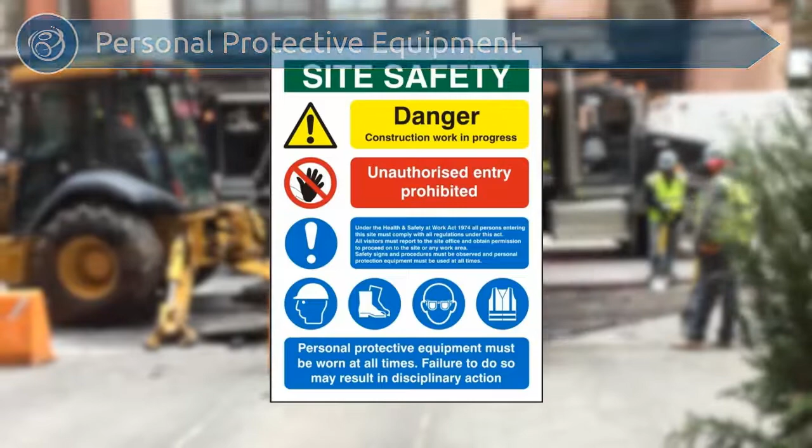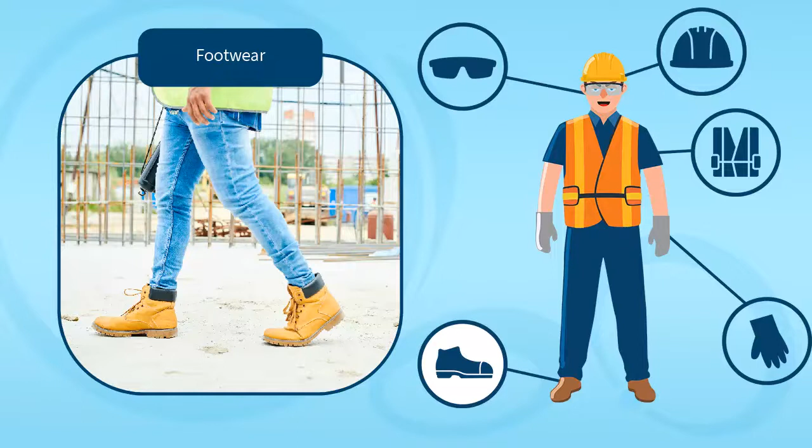Working on a construction site comes with many risks that can be mitigated with the use of personal protective equipment, PPE. The following articles are required when working on site. Footwear. Work sites present risk of injury from nails or other sharp objects penetrating shoes, as well as risk of heavy objects being accidentally dropped onto a worker's feet. To minimize this risk, steel toe-capped boots with midsoles are required to be worn at all times.

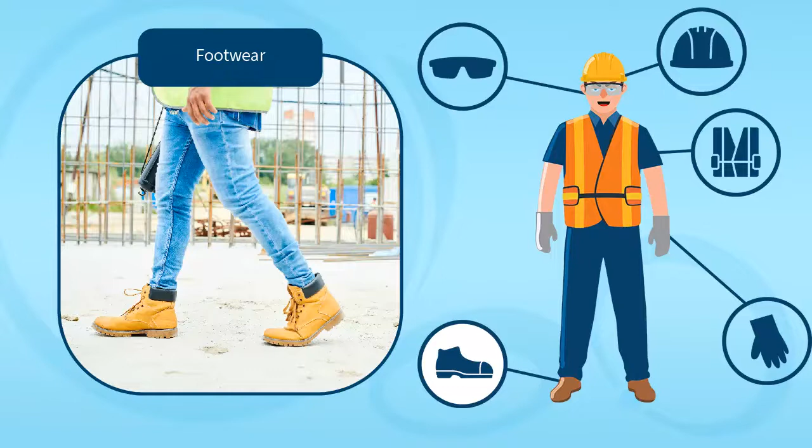Waterproof steel toe-cap boots offer essential protection from burns when working with wet cement or concrete due to its highly corrosive nature. Hard hats. Minimizing risk of injury from falling objects is a priority on any site. Barriers and toe boards on work platforms are provided in order to prevent falling materials. Hard hats add protection from any other risks and must be worn at all times when on site. They must also be worn correctly and fitted properly.

Eye protection. Safety glasses or goggles are to be worn to protect workers when performing tasks such as disc cutting, using a nail gun, welding or working with chemicals. Gloves. When dealing with wet concrete or dust, gloves should be worn to prevent dermatitis, as well as to offer protection from splinters and cuts when working with bricks, steel and wood. High visibility clothing. Clean, high-visibility clothing should be worn to protect workers from accidents caused by vehicle or equipment operators.

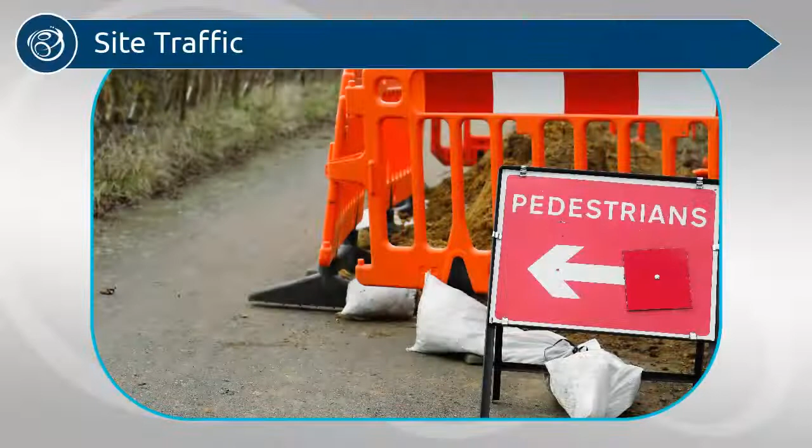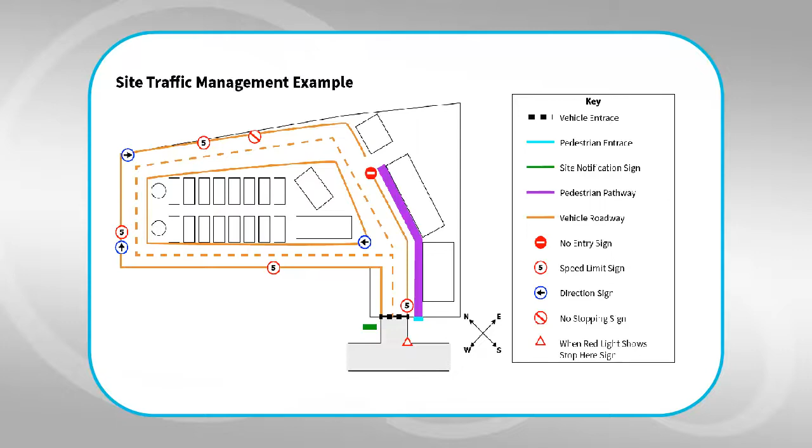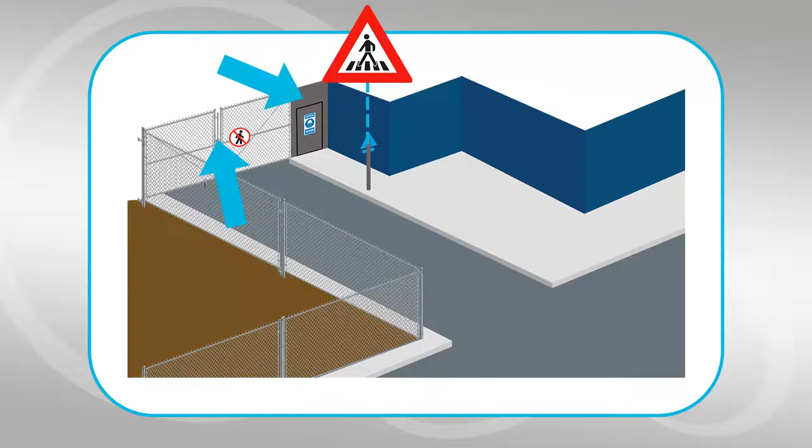Well-lit, clearly signposted crossing points are provided where walkways need to cross a roadway. Separate entrances are provided for both pedestrians and vehicles. At any exits where vehicles may have to cross the public footway, workers must ensure that visibility of approaching pedestrians is possible by using wire mesh fencing around site exits.

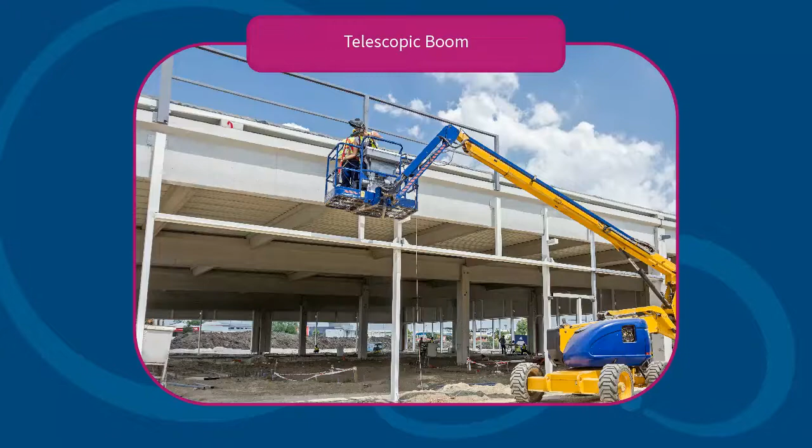When working at height from a ladder or a platform is not possible, mobile access equipment, such as mobile elevating work platforms, can be used to ensure safety and prevent falls. There are three main types of mobile elevating work platforms, MEWPs. Telescopic boom, commonly known as a cherry picker, provides vertical lift and outreach. Scissor lift provides vertical lift only.

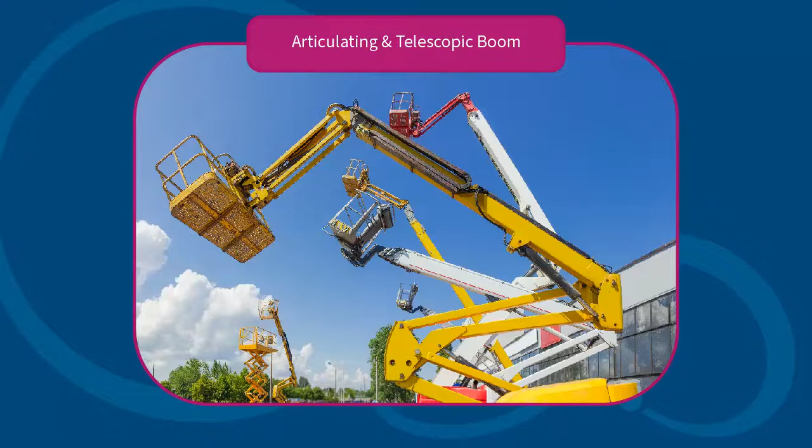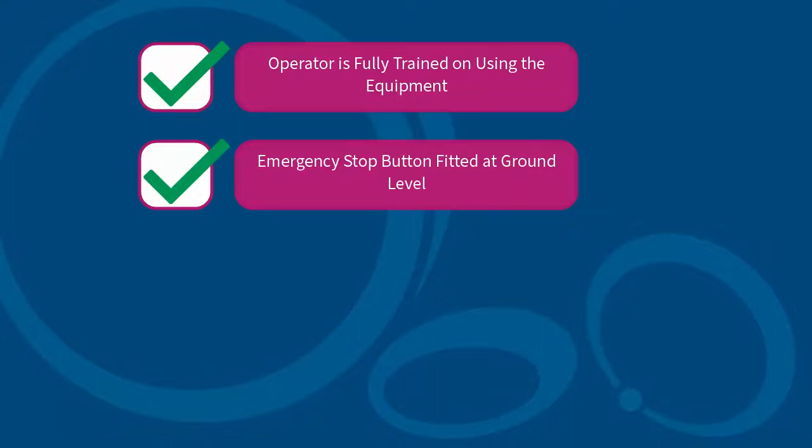Articulating and telescopic boom. These are used for specialist work in instances such as bridge repair as they are vehicle mounted. Be sure that the operator is fully trained on using the equipment, an emergency stop button is fitted at ground level, there are suitable barriers around the work platform and that the machine is to be used on firm and level ground.

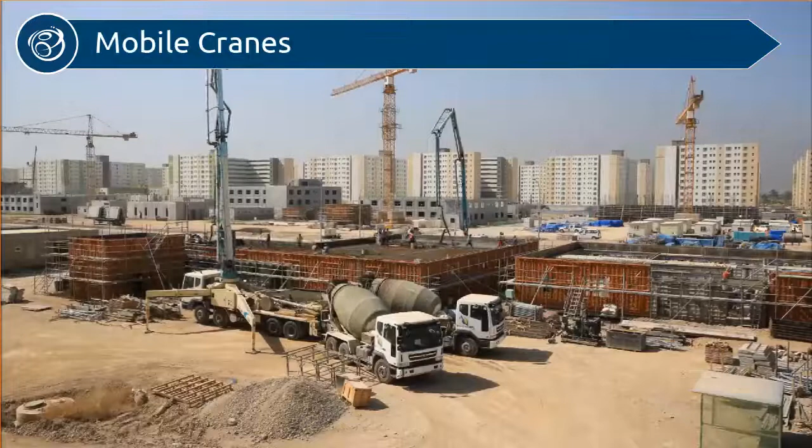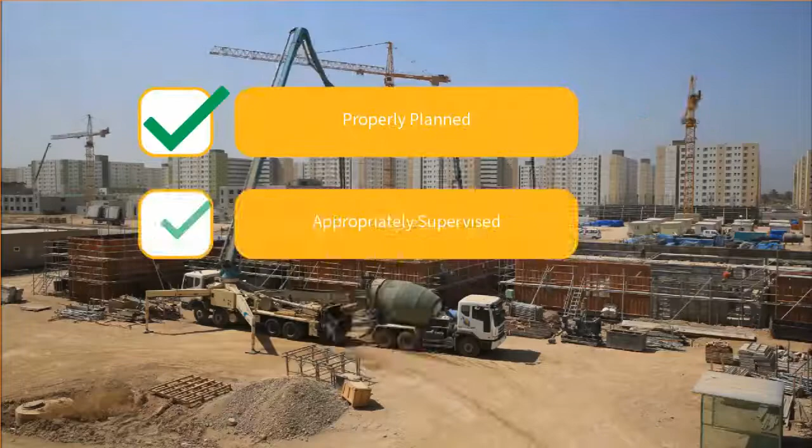Whether it's use of a lorry loader on site or use of a mobile crane to move heavy loads, all construction jobs are likely to involve lifting operations. Any crane capable of travelling under its own power is considered a mobile crane. Mobile cranes provide a safe way of performing lifting operations. Use of mobile cranes needs to be properly planned, appropriately supervised, and carried out safely.

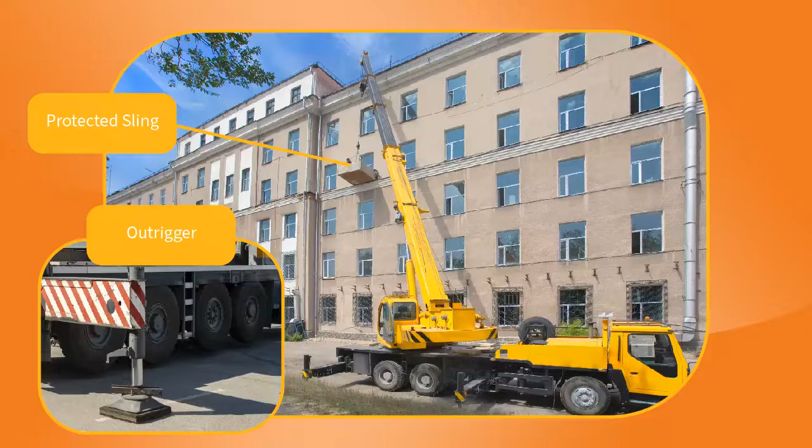In order to stop a mobile crane from sinking into the ground, outriggers support the crane as well as timber packing. Slings are protected by packing around the load, which is fitted with a tagline to allow easy control. The counterweight must have adequate clearance from the wall.

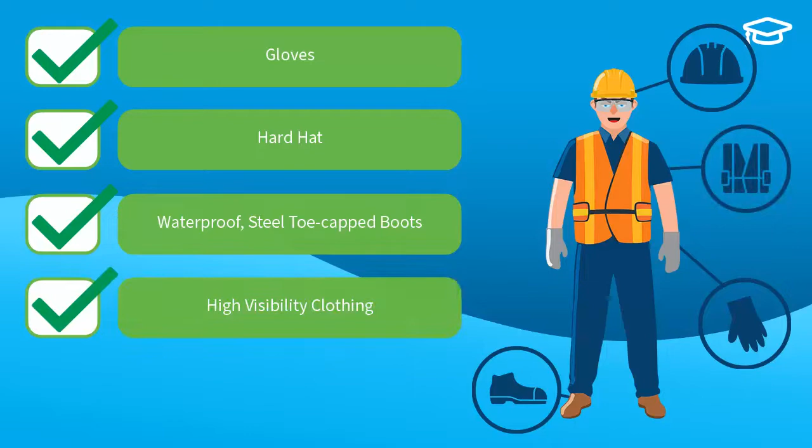The personal protective equipment the worker requires is gloves, hard hat, waterproof steel toe-capped boots, high visibility clothing, and safety glasses or goggles. That completes this module, Health and Safety, On-Site Safety.